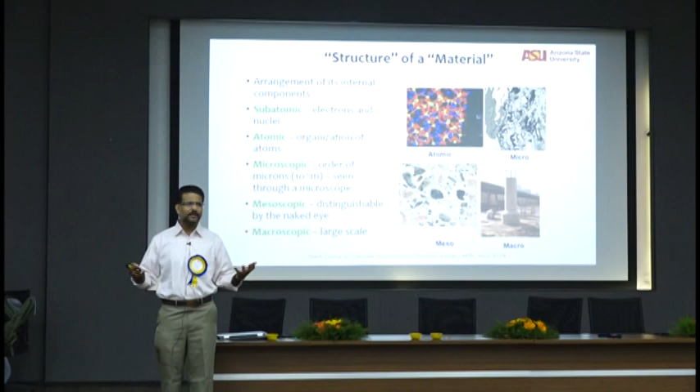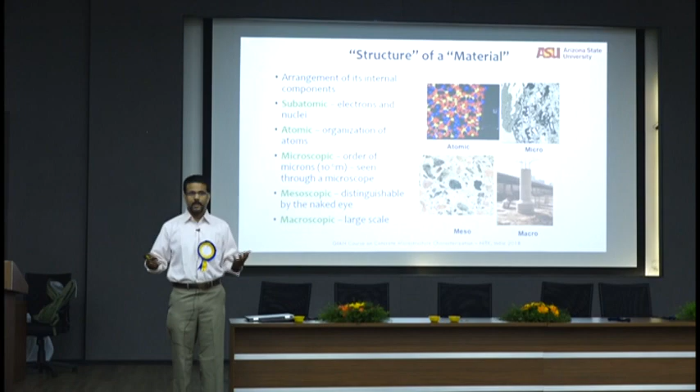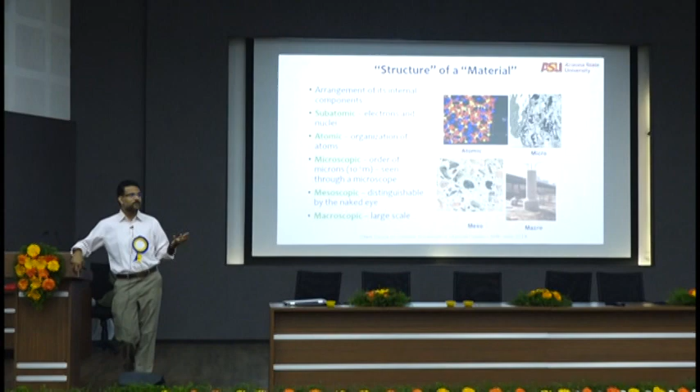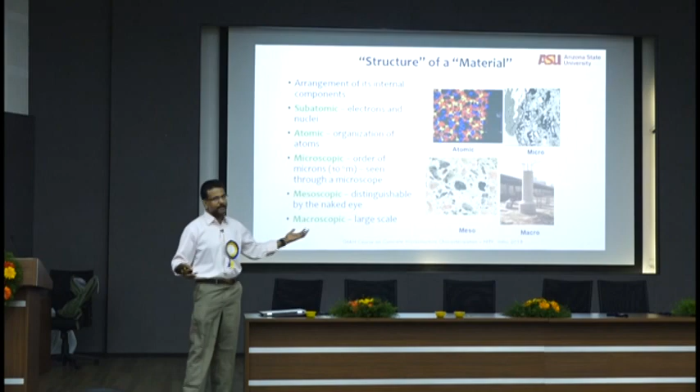Now if you look at the periodic table from chemistry class, how many atoms are in it? Give me a range, nobody can tell with certainty because things keep changing, roughly 110 elements, each with their own atomic structure. How many materials have we formed out of these 110 elements in the world? What would be the theoretical number if you had infinite power to make as many materials as you want from the periodic table, since you can't make from anywhere else? This is a math problem, like an IIT entrance problem: 110 factorial, theoretically. How many is 110 factorial? 110 times 109 times 108, all the way to 1, look at that number. So theoretically that many is possible. Now chemistry says, hold on, I cannot mix rare earth elements with metallic elements, I can't mix this with that, hydrogen and helium can't mix. So you have a lot of constraints, but still the number of materials we've generated is humongous.

We have compounds, multiple element compounds, combinations of different compounds. We have alloys, which are not compounds but solid solutions. We have so many different things. So the structure of any material, when it comes down, you start off from the atomic scale.

Oops, where's the pointer? Which one is it? The red one. Okay, oops, what did I do?

Okay, so you start from the atomic scale. Let's say that's too complicated, I don't want the atomic scale, I want something more generic. So if you look at concrete, this is what you'll see in a structure outside, the large scale structure. If you take a piece of concrete and look at it with a naked eye, that's what you'll see: aggregates, and cement paste gluing all the aggregates together. If you put this bit of cement paste under a microscope, that's what you'll see, but now it looks more homogeneous. If you ask a kid looking at a concrete column or bridge how many materials they see, the kid would just say one. But the moment you give him a piece of concrete and ask how many materials he sees...

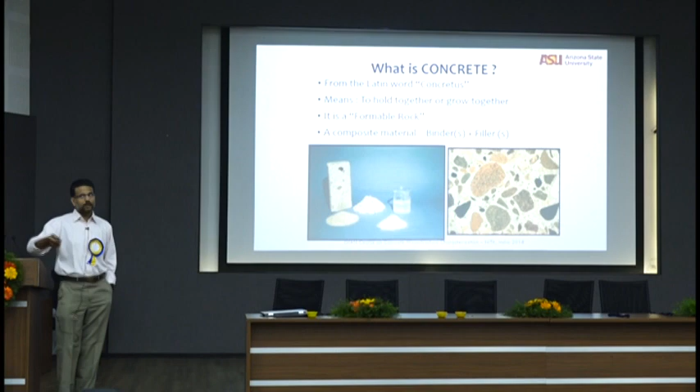So for concrete, it's from the Latin word concretus, which means to grow - concrete means to grow, not to grow trees on concrete, but to grow by itself, to change its structure by itself. It's a formable rock, it has binder and filler, all of these things you know, so we'll quickly go through it. But just to look at the scale of use.

Now it is the most used material after water. So no question, there's a lot of people saying concrete is not sustainable. I'll come to the sustainability point also. You will hear a lot of people saying, oh this is not a sustainable material. True, to a certain extent. I think we should accept the fact that this is not the most environmentally friendly material you can build with.

Now, if I want to build something - food, clothing and shelter are the basic needs of human beings. So if I need something for people to live in, if I need something to drive through, if I need to build something to bridge over something, what are the other options? If not concrete, what will you have? Give me some options - asphalt? Asphalt is only for one purpose, that is roads.

And anybody who is talking about asphalt as a sustainable material should think twice, because where is it coming from? Petroleum, right? So if you think petrol and the extraction of crude oil and petroleum is sustainable, all power to you. What is the other option?

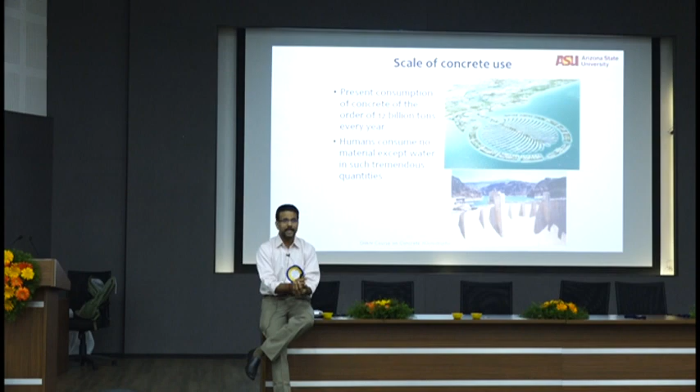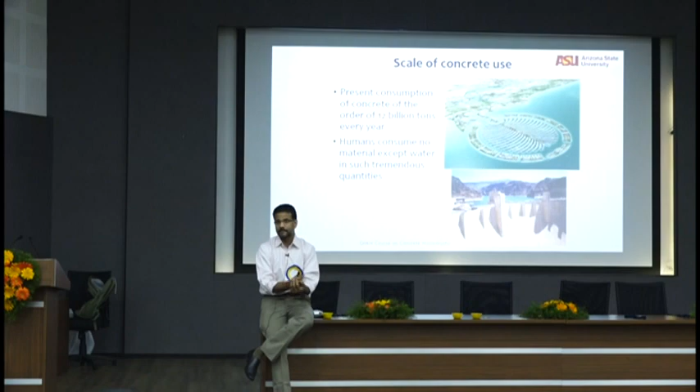But sustainability has a context built into it. Sustainability depends on what context you're asking about. If you're really sustainable, if you say 'I don't care about the context, I am a very sustainable human being,' stop driving your car or bike today, walk to every place - can you do it? Stop traveling in an airplane, it's the biggest contributor to greenhouse gas emissions. We can't do all of that. So sustainability has to be context-driven, whether it's concrete or any other material.

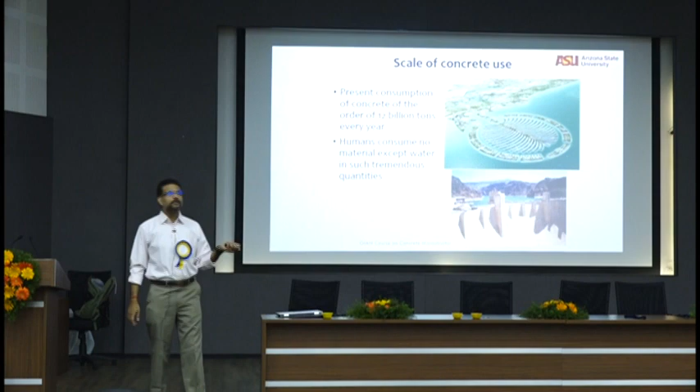With concrete, we have to be careful about minimizing the amount of perishable resources that we use, and we also need to be very cognizant of the emissions we generate as a result of concrete use. There are so many ways of doing it, but in a room like this, we can't make things happen - things have to change by changing specifications, changing standards. Somebody should be confident and comfortable.

Now, I can tell you what is the limit of fly ash use in India in concrete. So if I have an M40 concrete, how much fly ash am I legally allowed to use as per IS standards? 30%? 35%? 35% is the legal limit. Where did the 35% number come from? Why did the 35% number come from? What do you think?

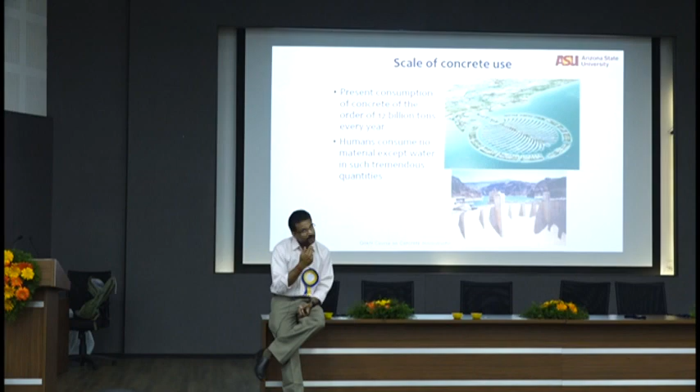Trial and error research, very good answer. Yes, that's where it started. And then, after research, what happened?

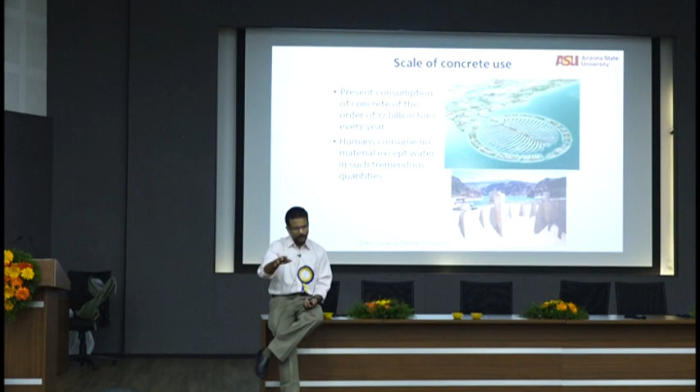Forget about that, we'll come back to the calcium hydroxide story as we go through. What else?

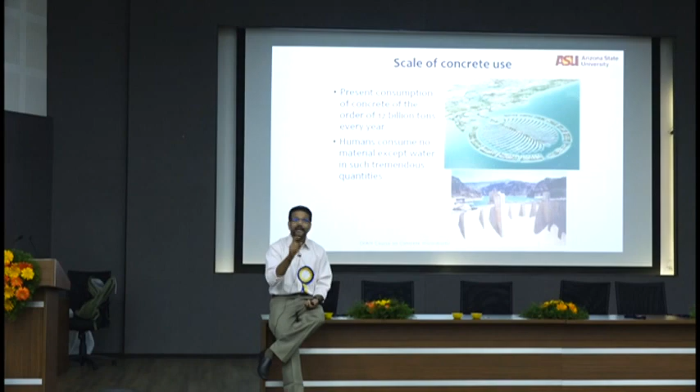Regulatory constraints. Why did they regulate to a certain number? With ordinary Portland cement, you can do whatever you want and that thing will hydrate and give you strength. You can add more water. Cement is such a forgiving material, it'll say, okay, you put more water, that's okay, I'll try to hydrate more and fill all the pores.

Fly ash can't do that. Fly ash needs something else as a catalyst to help it work. So the regulatory authorities came in and said no, you can't throw it in like this because you really don't know what's happening. Have you still seen the guys pouring water in the back of the truck when the concrete is not very flowable? You see that now, right? When somebody says water cement ratio of 0.4, you'll make it 0.45.

Has those structures failed? No, they stand. Very forgiving material. So there are regulatory reasons for us to stick to a certain number, and also it's to avoid mishaps because people do things wrongly.

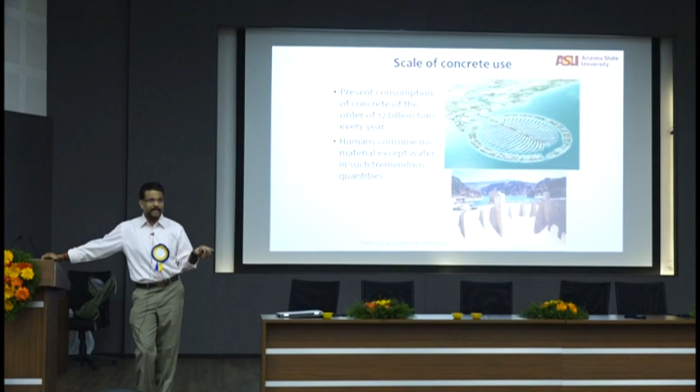Concrete is a site fabricated material. Most of the time, precast construction is not very strong in India unless you are talking to L&T or a few companies like that who have precast plants and are good at building precast structures. All of us use, and if you look at any common residential construction, like Narayanan was saying, it's still 1:1.5:3. People still mix it the way they want to. Concrete is a very forgiving material, therefore you can do the work.

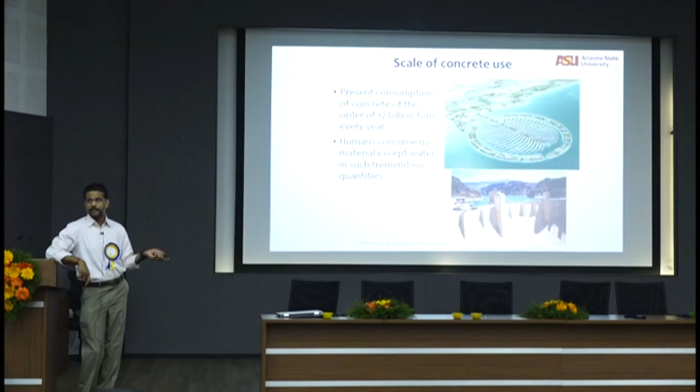But if you look at the scale of concrete use, 12 billion tons every year. This is billion with a B, so million, 1,000 million is a billion. So you can do the math. Very, very highly used material.

Now, concrete is very, very forgiving in another way. You always hear the weak link failing theory, right? If you have a chain, it's always the weak link that fails first. In concrete, for some reason, there are only weak links. And we'll see, I'll show you when we see the microstructure, it's made completely from weak links. The microstructure is nothing but weak links.

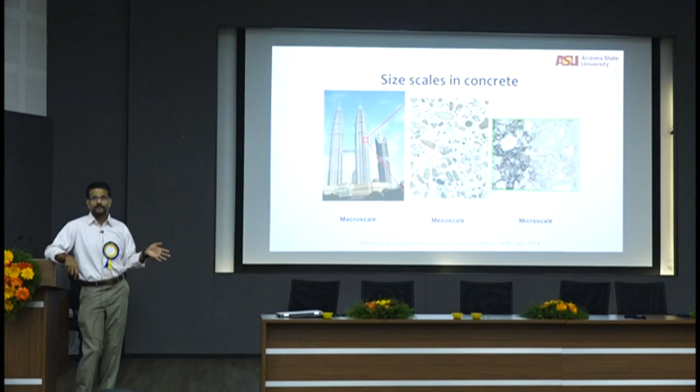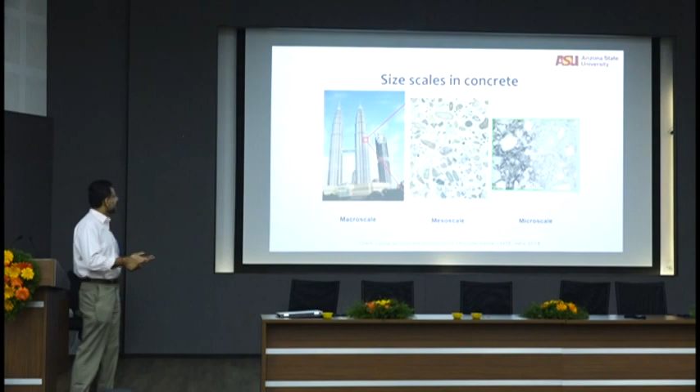But still, you generate enough stresses to hold the whole thing together as a composite material. And then, of course, if you go down, I'll show you more pictures as we go through of what happens.

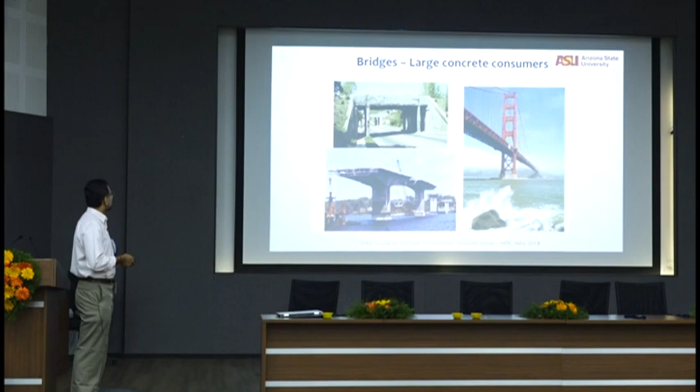Okay, bridges are large concrete consumers. Some general pictures to show the scale and size. Concrete pavements - this is the first. I mean, it looks like a mud pavement, but this is apparently the creation of the first concrete pavement in Michigan.

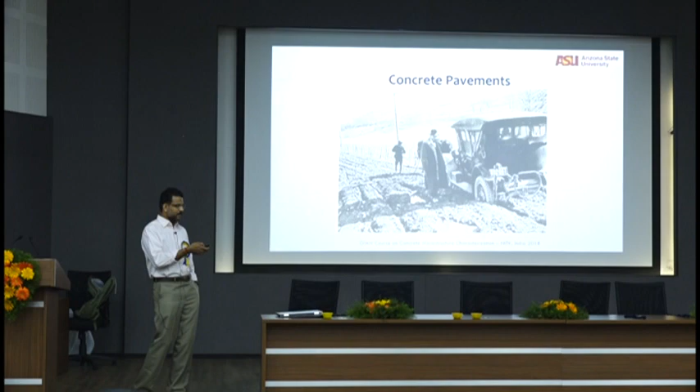Lot of concrete pavements being built in the U.S. Lot of interstate highways are built completely with concrete. The advantage is that it lasts for - it's expensive to start with, but it lasts for much longer time.

I heard 2 or 3 years ago that the government of India was talking about doing concrete highways. I don't know where it went now, I haven't heard anything after that. It's very difficult because, again, what controls all this is not just techniques, right? There's lobby. There are people lobbying for their respective products, people lobbying for certain techniques, contractors who have been doing this always want to do it the same way.

So there is a lot of other regulations, and I actually sent out one complete proposal once to the Ministry of Roads, Ministry of Highways, because I had a friend who is a consultant in Delhi meeting the Secretary of Surface Transport, and he wanted me to send a whole report on surface transport, but I think it's in some dustbin in Delhi now. But that's all I can do, right? I can send a report if asked for, but if it goes to a dustbin, I have no control because I'm not a politician.

Okay, so you can have air runways made of concrete. A lot of concrete pavements in the US have been there for a really long time - you're looking at 30, 40 years.

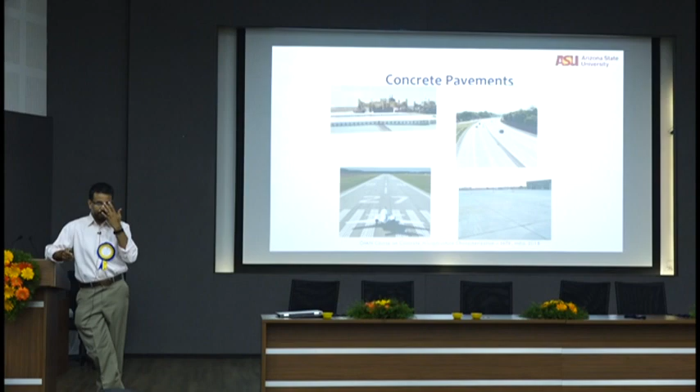All of you know the idea of creep, right? Creep in concrete. These very thick reactor domes that were built, heavily reinforced. I don't know if you've seen how nuclear reactors are built. They put the reactor in and then dome it around, because you can't create this heavily reinforced dome with an opening and then insert the reactor. So they build it and then take it out. In the US, they have nuclear reactors that were supposed to last 40 or 45 years. 90% of US nuclear reactors are now in their 60th or 70th year, when they were designed for 40 or 45 years.

Now, creep is a big function of mass, right? Self-weight does a lot on creep. Creep is permanent deformation under constant stress. So you have a lot of deformation happening in these thick structures. What will creep eventually do? What will high stresses and tensile stresses in concrete eventually do? Cracks, right? Cracks start to come in.

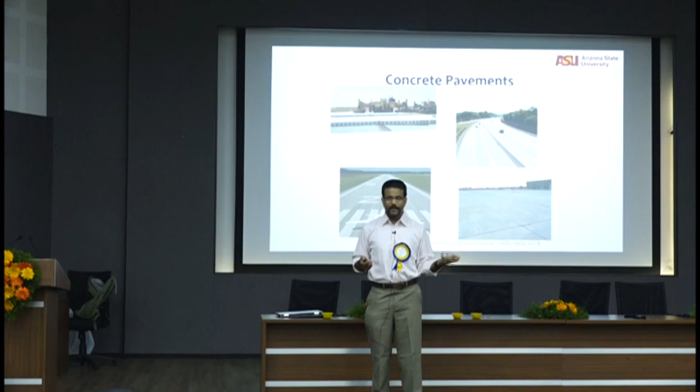Now, how would you fix a crack normally? Your director was talking about grouting, right? And grouting causes stresses somewhere else, because you're trying to fill a weak zone and that creates stresses elsewhere. So what they did was look at this cracking and try to relieve the creep stresses. They did a lot of finite element analysis and cut out a few parts, and that caused massive cracking all through the dome because stress relaxation was not proper.

That reactor could never be opened back again. $1.2 billion was spent - that's $1,200 million, converted into crores if you want. That's a huge amount. And that reactor could not be opened because the idea of concrete creep, after 60 years when it was designed for 45 years, was not accounted for.

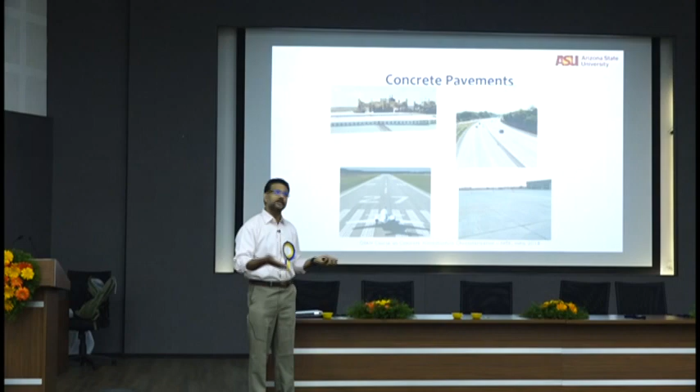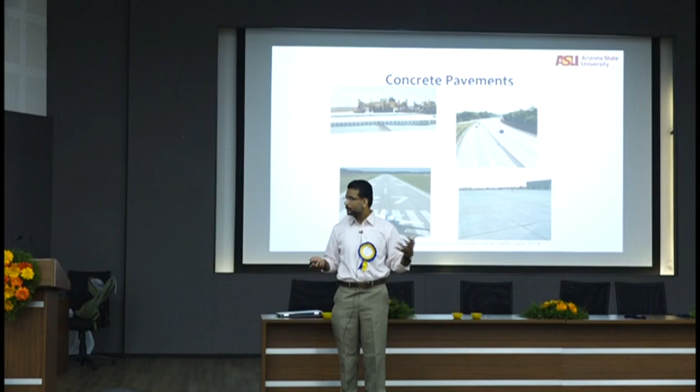So now they are embarking on a program to see how they can extend the life of nuclear reactors. Because after Fukushima happened in Japan in 2011 - you remember that tsunami and the nuclear reactor damage - after that, no country wants to build a new nuclear reactor, because you don't know what's going to happen. Therefore, currently what is happening is they're trying to extend the life of nuclear reactors by another 20 years.

Which means the biggest question is, what will we do with creep? Where does creep come from? I'll talk to you about that when we get there. Where does creep in concrete come from? Creep comes from the microstructure of concrete. It comes from the layers of CSH, calcium silicate hydrate. It is a microstructural property. Where is it manifested? In the big, massive dome, as cracks.

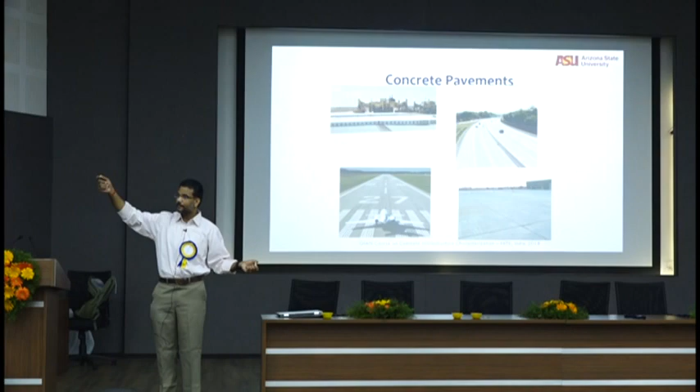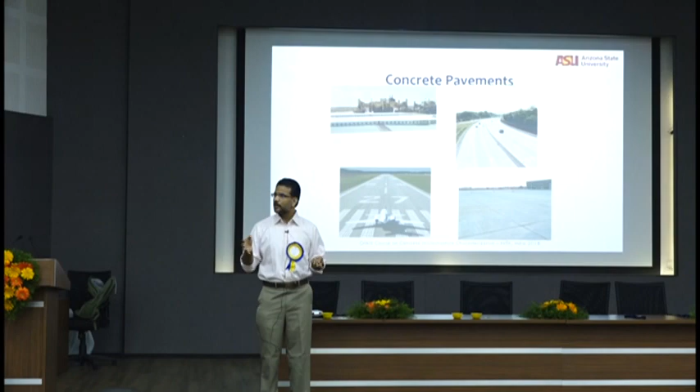You see the connection between the extreme small scale and the large scale? So if you're trying to solve creep, you don't solve it by grouting. You try to solve it at the micro scale to see what is happening. There are techniques called atomistic modeling - have you heard of atomistic modeling? Molecular dynamics? A lot of people do this, trying to see how two individual atoms interact, at very small scales. That's where all this comes from.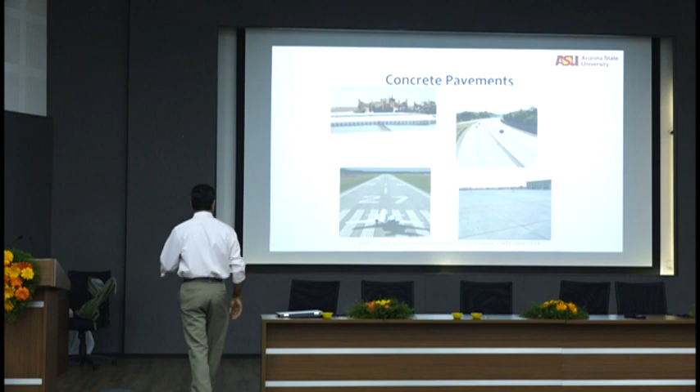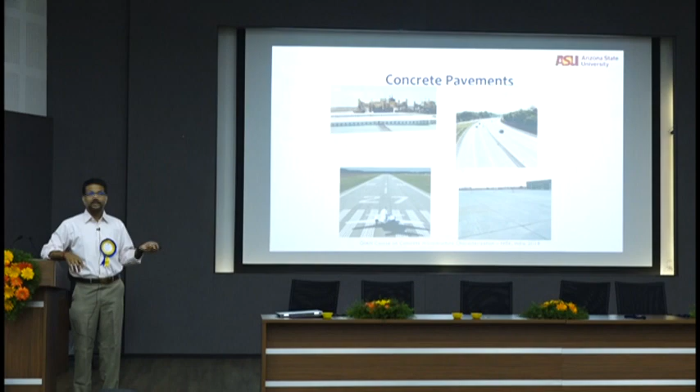I'll introduce you to a few of those things. I just want to give you an idea that whatever you see at such large scales is nothing but a manifestation of what happens at very small scales. So you can't just go and say, yeah, I see a crack, I fill the crack. It might work on certain occasions, but in critical structures it's very unlikely to work.

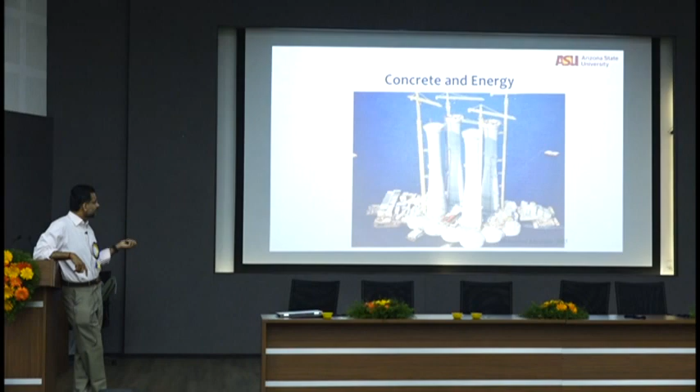That's the early concrete road in Michigan, 1909. You can see by the vehicles that they were using at that time - it's really old. Energy structures - look at the size and scale of these structures, these offshore platforms. Concrete is the only material that you can use to construct those. Of course, historically, people did things with concrete.

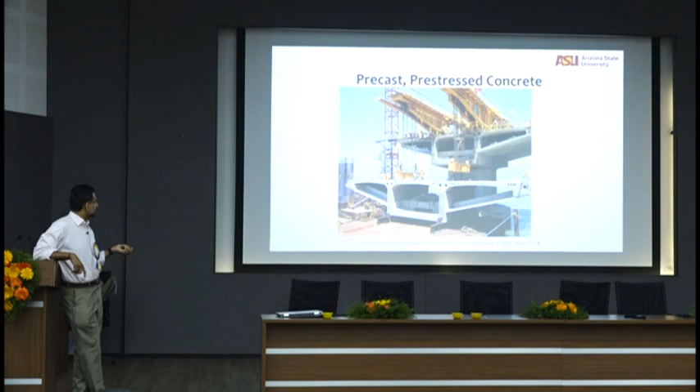Big bridges, precast bridges. So finally, you have cement, water, fine aggregate, coarse aggregate. This is old school.

Now, no concrete is made without chemical admixtures. You have a cocktail of chemical admixtures, not just one. You have one chemical admixture for every purpose - one to reduce the water, one to use in hot climates, one to use in cold climates, one to retard, one to enhance the hydration, one to waterproof, as many as you want. And then you do all these, and what happens?

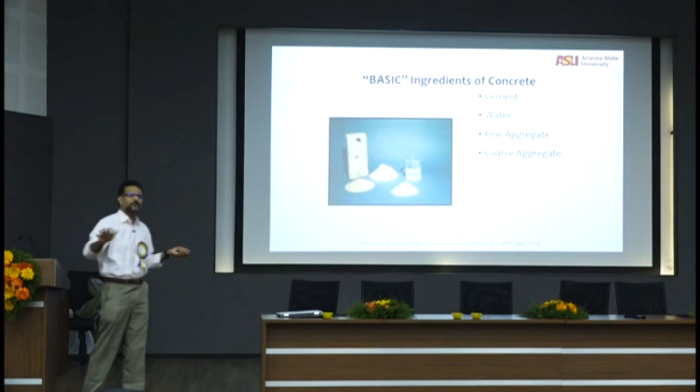Oh, there is cement admixture incompatibility. I have a very simple example for this - you will immediately understand. You have 15 dishes spread in front of you, and you indiscriminately eat all of that. What will happen? Concrete will do the same thing only.